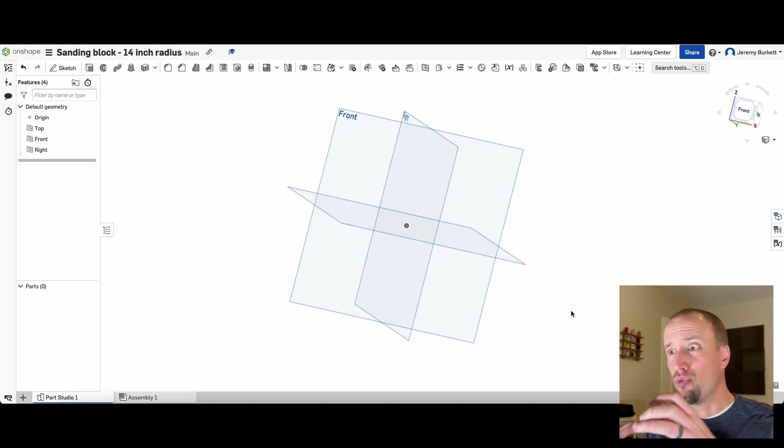All right, everybody, we are here and all set up. You can see on the screen we've got a blank document set up for us on Onshape. As we said before, really the goal is I want to 3D model a rectangular block, and then cut out a curve on one side of that block. So here's what we're going to do.

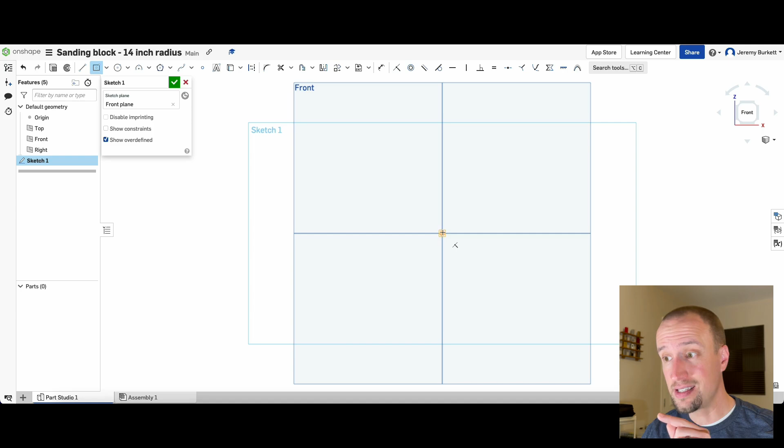You can take this and see I can move it around. I want to orient it over here on the top. I'll click the front to get us nice and flat. Then we need a new sketch, so I'm going to sketch on this front plane. One of the simple tools we have is this center point rectangle. I can come to the middle of the drawing, click once, and then start moving my mouse around, and wherever I click, it will draw a rectangle.

Now, I said before I want specific dimensions. As soon as I click it, you see these crazy numbers out here. That's because this document is default set to metric units, so it's measuring everything in millimeters.

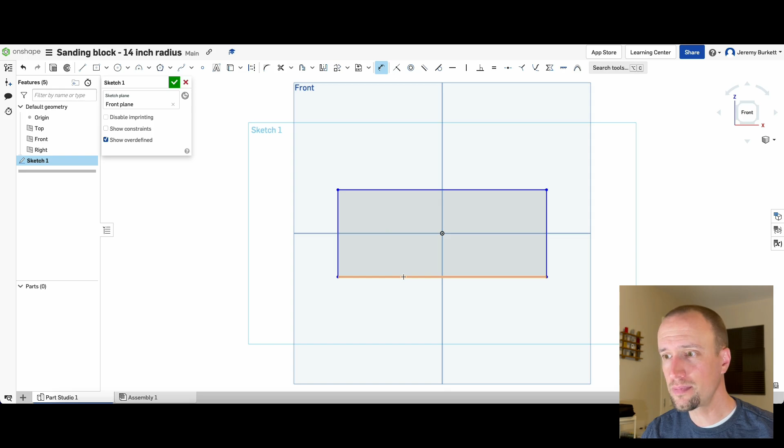What I can do to intentionally change that, there's also a dimension tool. I click on the dimension tool, then click on this one side. If I come out, you can see it's set to 105.4 something millimeters. All I have to do is set this side to 3.5 — a 2x4, if you go to the hardware store, is actually 3.5 by 1.5, it's a bit of a misnomer. So I click 3.5 and type 'inch.' Watch what happens when I hit enter — it moves to 88.9, which is just the millimeter equivalent of what I put in.

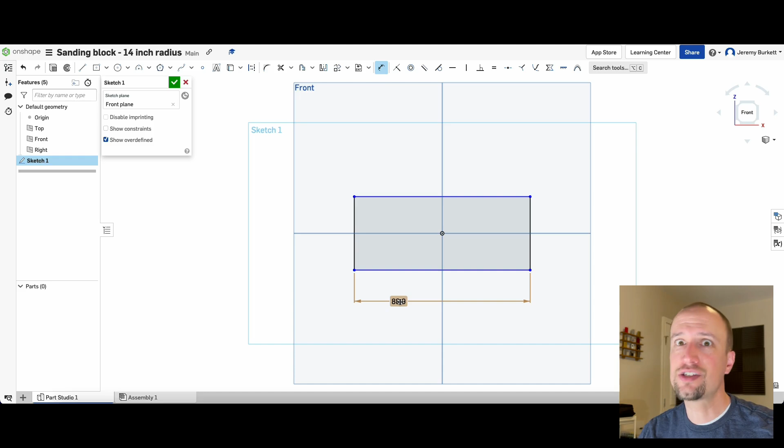Still with the dimension tool, I come here to the side — you can see it's 36 and something. I want this to be 1.5 inch, and there we go. Hit enter, it switches to 38.1, the millimeter equivalent. We now have a rectangle that is the side-on dimension of a 2x4.

Well, how do we get this to 3 dimensions?

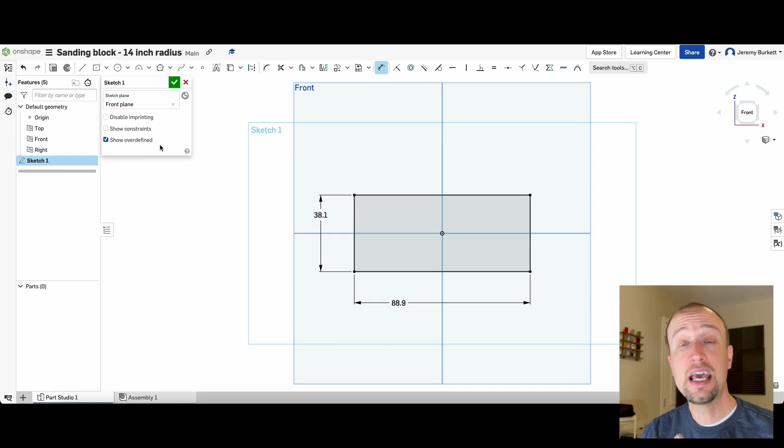This is still 2D - if I rotate this, you can see it's only flat. Well, here we'll line it back up to front. I'm going to take the extrude tool. That's going to allow us to take this shape and actually move it in whichever dimension. I'll move this a little bit so you can see - now it's 3D, but it's coming out at us.

I typically like to work the opposite direction - I like to send things back into the screen. And how far do we want to send it? Well, I measured those blocks, and anywhere in the 8 to 10 inch range is a good size for my hands, that kind of thing.

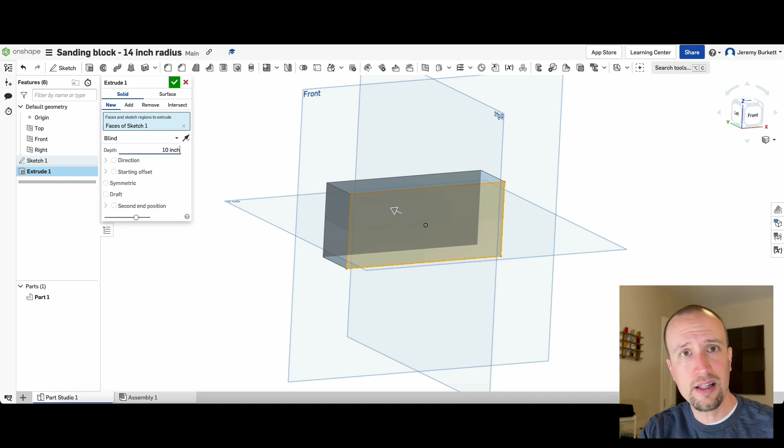So if I click in here to the depth, let's just say we make this 10 inches. If I hit 10 inches, it's a solid surface - you can see all the other settings. If I hit enter, now look what happens - if you move this around, now we've got a block. I'll zoom out a little bit. Now we've got a block that's modeling a 2x4 chunk that's 10 inches long.

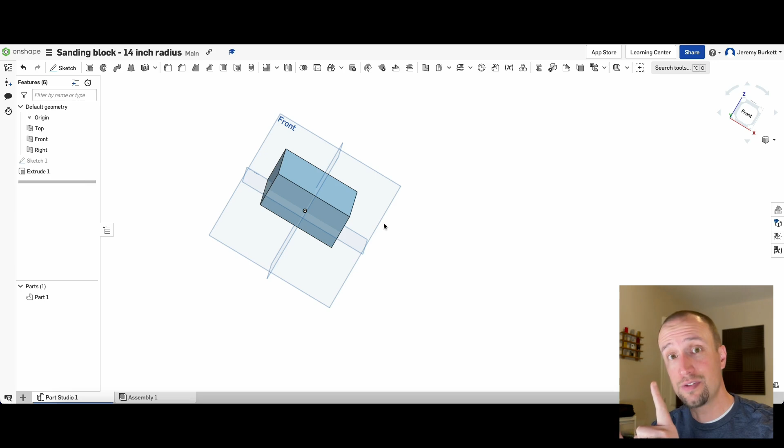Now if I hit the green check mark, that's great. We have the start of something here, but remember, I need one of these surfaces to be curved, and I need it to be a specific curve. I want a 14-inch radius for the neck, which means I need to draw a circle where the radius is 14 inches, meaning the diameter is 28 inches, and I need to use that circle to scoop out that side. So how do we do that?

Let me reorient this to the front, and we'll show you. I'm going to create a new sketch so my rectangle and my circle are separate. I'm going to still use the same plane to sketch that, but now the tool we're using is a center point circle. So you go up here, click the center point circle, and I'm not going to put it right on the middle - you'll see why in a second.

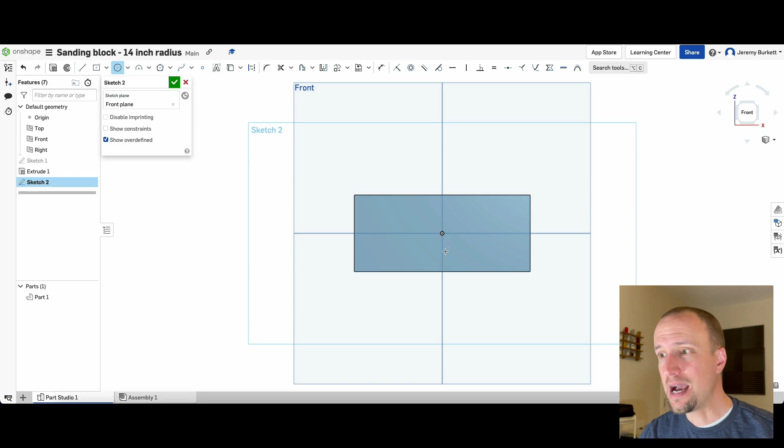I'm going to move this up. Now you'll notice it still does recognize - I want it to be lined up on the center line, so you can see it kind of highlights it when I get close. So I'm going to click once, and then as you see, I can drag this circle out.

To save ourselves time, when I click here, the first thing you can do right after you click is actually go in and type. So I'm going to type in 14 inch - it just cuts out a step instead of using the dimension tool. Type in 14 inch, and when I hit enter, you're going to notice something happen - the circle gets huge.

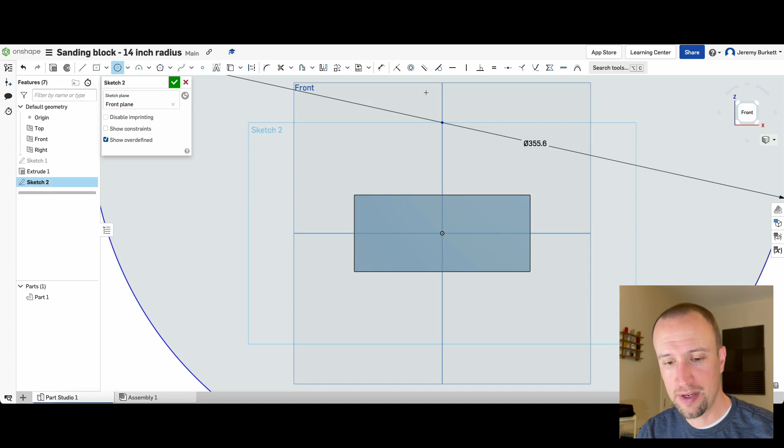And you can kind of see here that, oh, you know what, I messed that up - let's go back and undo that. That made it a 14-inch diameter. You can see here that this line goes the entire way, which means we should actually have typed in 28. So here's what I'm going to do - actually, where's my undo button? There we go, undo, undo.

Go back, get our center point circle, click, drag it out. This time I'm going to type in 28 inch. Now we have a 28-inch circle, which is 14 inches in radius. Now I'm going to zoom out - you're going to see, wait a minute, it looks huge. Well, actually it should be huge. If you think about it, 3.5 inches is our rectangle, 28 inches for our circle, it really should be large.

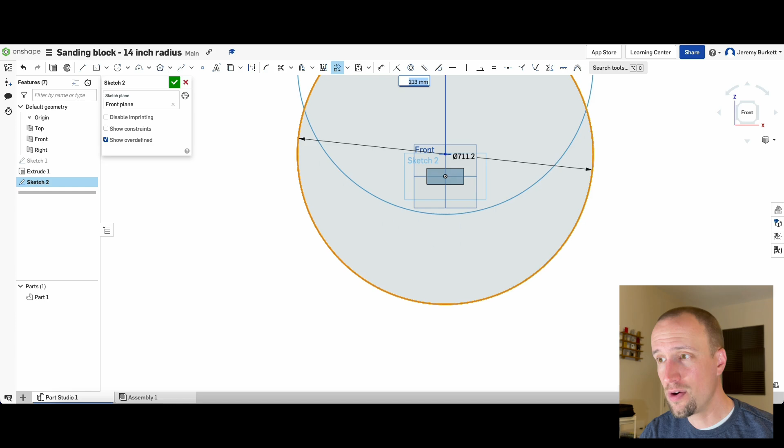Well, I want to now get one edge of this circle to just skim off the top. So what do I do? I need to come up here and use the transform tool. I'm going to click on the transform tool and click on the circle. Now the circle - you can see I got these new controls here. I can move it to the side, I can move it up. If I click and drag this arrow up - I'll zoom out a little more so you can see this - if I click and drag the circle up, I'm looking at the bottom of that circle and where it cuts into the rectangle.

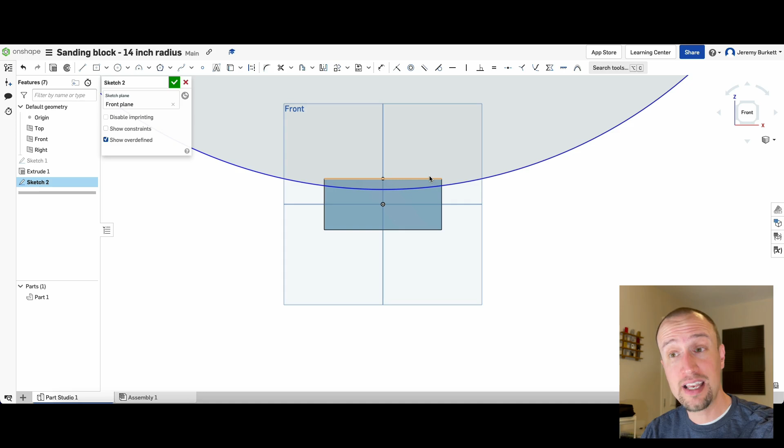Now if I click over here to accept the changes, you notice it moves the circle up. If I zoom back in, here we go. We have a curve that's coming down into that circle, coming down into that rectangle at the curve that I want. So now if I just move this sideways, all I need to do is take our flat circle and scoop out the existing material.

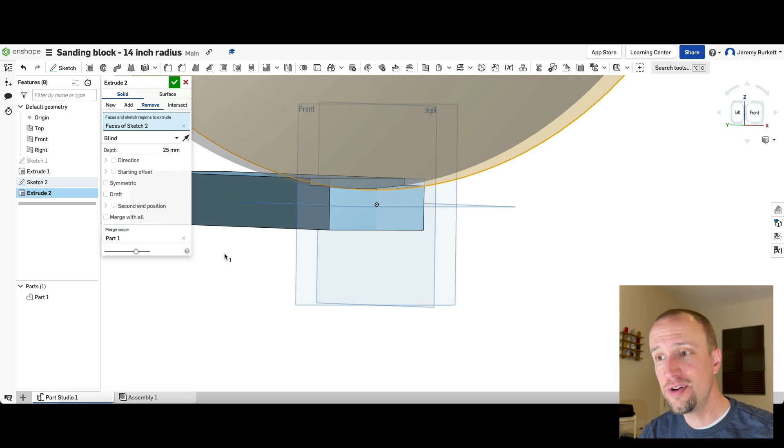So we're still going to use the extrude feature, but instead we're going to reverse the direction like we did before. Instead of add, I'm going to change the direction to remove. And if you notice, the remove is starting to already scoop out. So what I need to do is scoop out the entire 10 inches, so 10 inch in the direction.

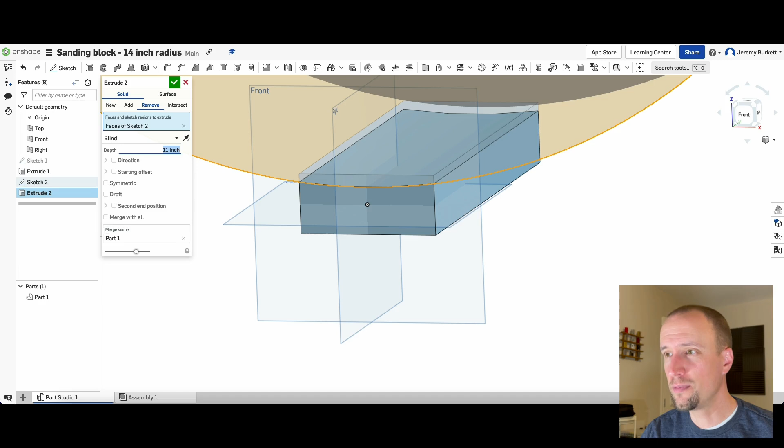If I hit enter, and now we kind of move this around, zoom this out and in, you can see it goes all the way to the back. Now, if we want to be extra careful about this, let's make this 11 inches so the circle goes all the way through. And let's accept that.

And now, if we look, we have a block that has a curve carved into the top of it. This is essentially what I need to send off to Jesse for him to load up into a CNC machine. He can take just a block of wood, load this file up, and then that CNC machine will carve away and leave us with this tool, which is what we need to finish the neck.

So that's what I'm going to do right now. I'm going to export this file, send it off to Jesse, and it's going to be a day or two, so we'll have a kind of a flash cut to a few days in the future, and we'll finish off this project. So I'll see you again in a little bit.

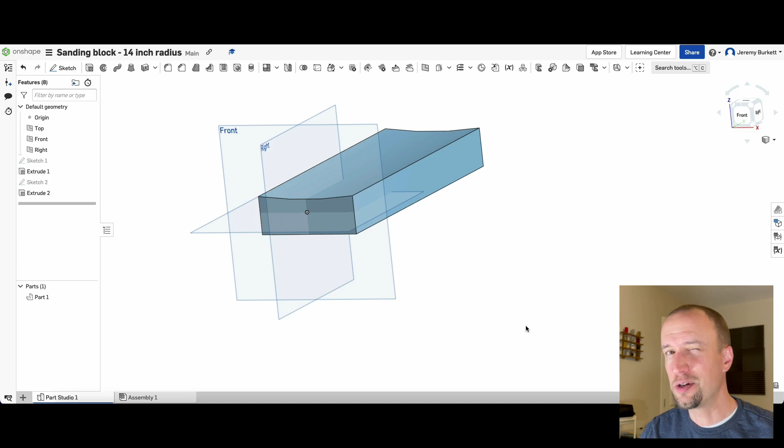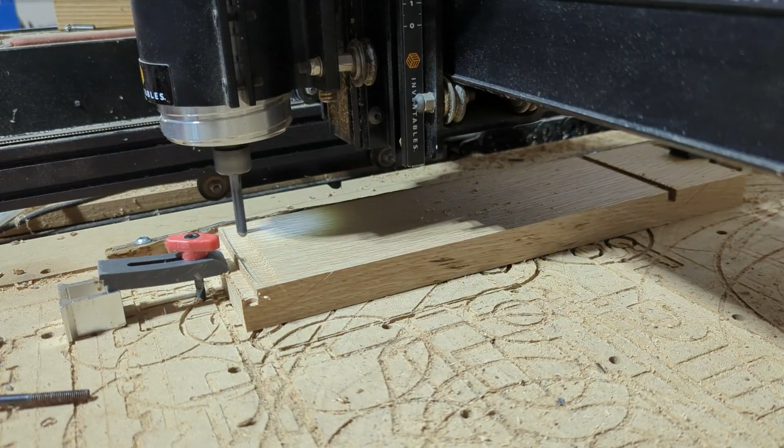All right, everybody, it has been a few days and I'm excited to report that it is finished. Our customized sanding block is done and here. Now you can see here, Jesse did exactly what we asked him to. He was able to take that file and load it up with some bulk wood that he had, and that CNC machine was able to carve in the dimensions of our 3D model and produce our sanding block.

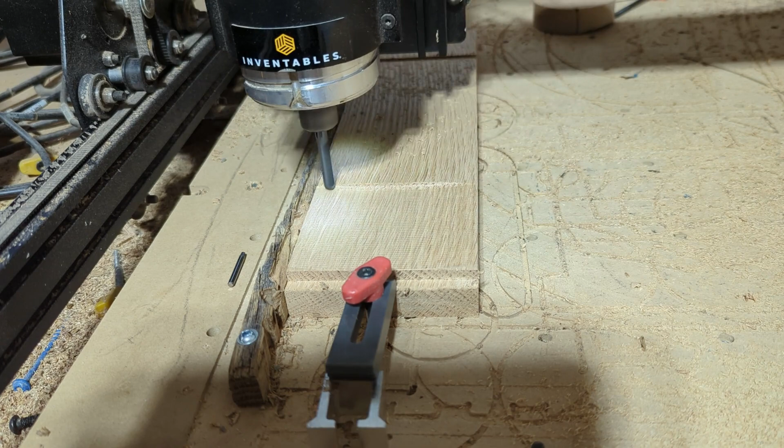So yes, it's true, we did have to build a tool to help us build a guitar. But at the end of the day, with a little bit of problem solving and a little creativity, we're able to get what we need to do the jobs that we need to do. So I hope you got something out of this episode. I want to thank Jesse again, we couldn't have done this without him.